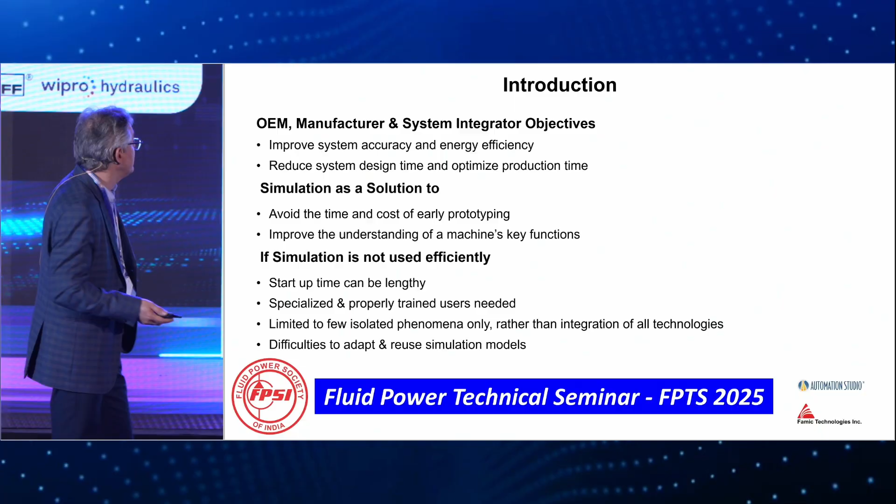So OEMs like to improve their system accuracy. They always think about energy consumption, moreover today. And they want to reduce time to market, so reduce the system design time and optimize also the production time. Also, simulation is well known; according to my study, for the last 30 years we are talking about simulation. This is a great solution to avoid the time and cost of early prototyping. Instead of creating a real prototype, you will be saving time for sure, specifically for system design.

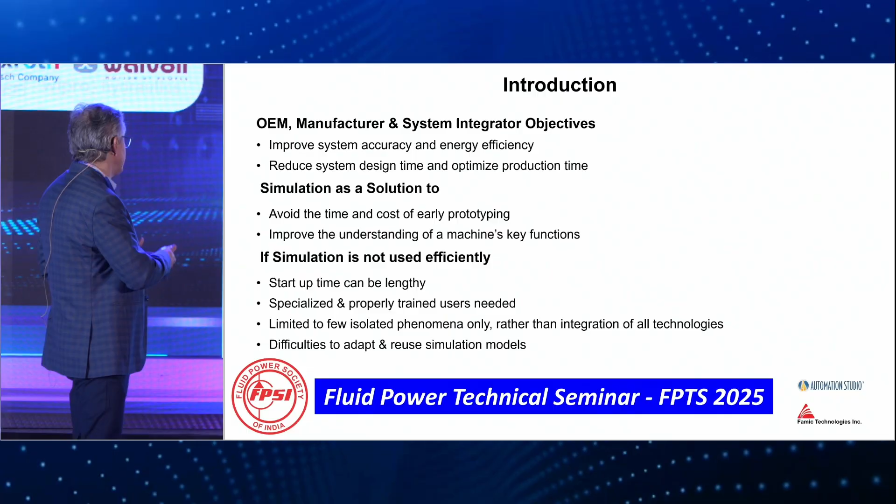Also, simulation is a great tool to learn and understand the behavior. But if simulation is not used well, there are other challenges. Commissioning time, startup time can be lengthy. Sometimes, if the user is not well trained, they will think the simulation can do everything for them. So they have to have a basic knowledge. Most of the time, over the last 20 years, there is a lot of simulation. Sometimes at OEMs specifically, they do a specific simulation on one part, but it cannot be integrated in the system. So sometimes simulations are...

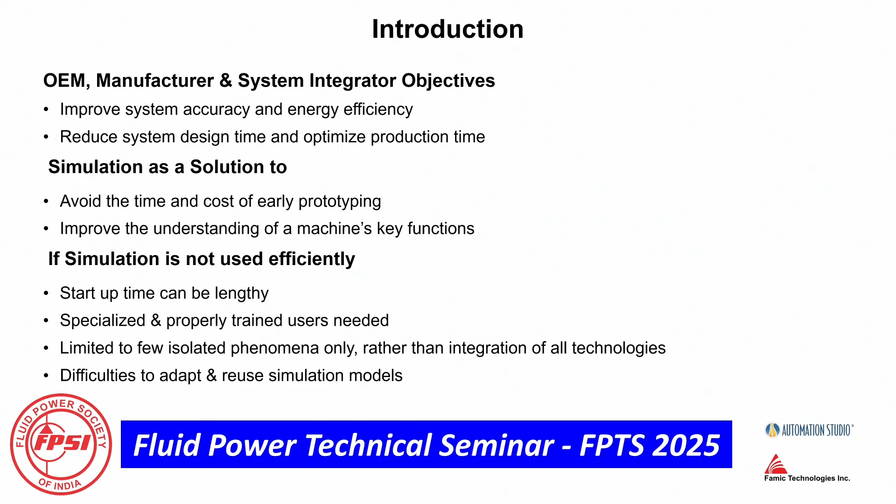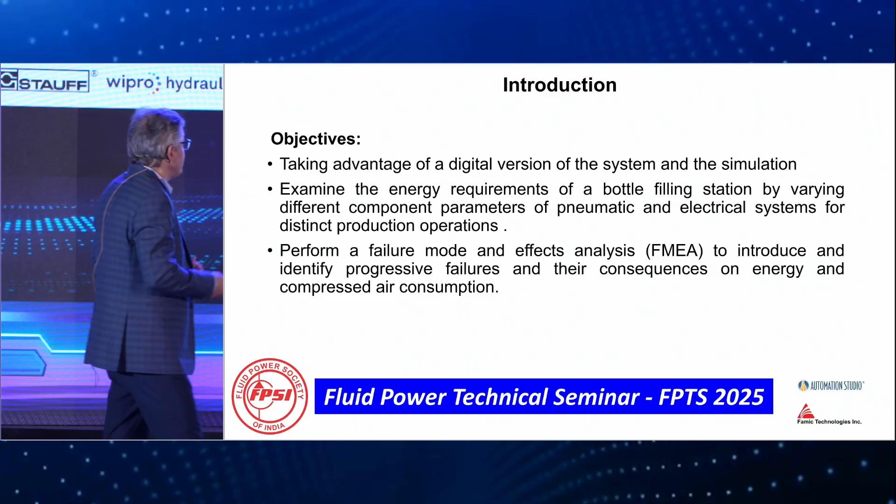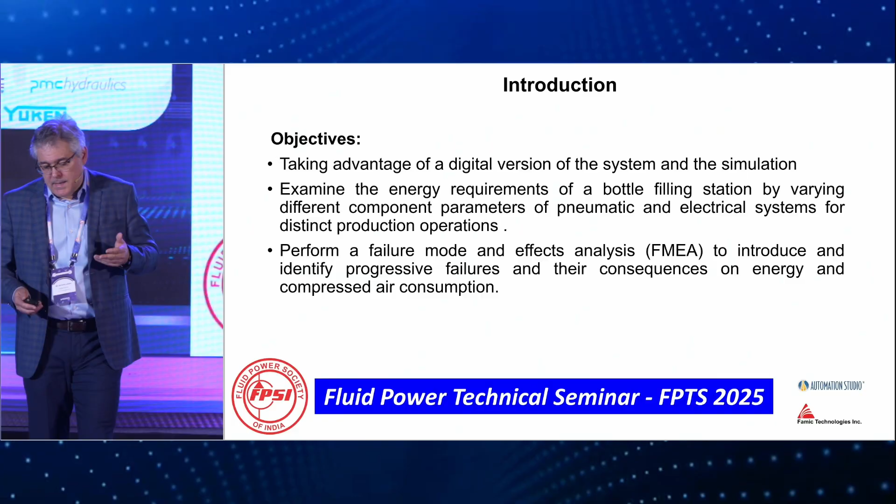Okay. So today I will present something pneumatic, a complete system. This is new for us since the beginning of the year. There are 3 objectives. Taking advantage of a digital twin, another buzzword for the last 10 years with Industry 4.0, and examining the energy consumption. This will be a single bottle filling station, a work center that we reproduce as a digital twin. Once we have the system, we can do a redesign of the system thanks to the simulation. Moreover, since we have an FMEA capacity, let's introduce some degradation in the system and see the impact on the cost of production or the energy consumption.

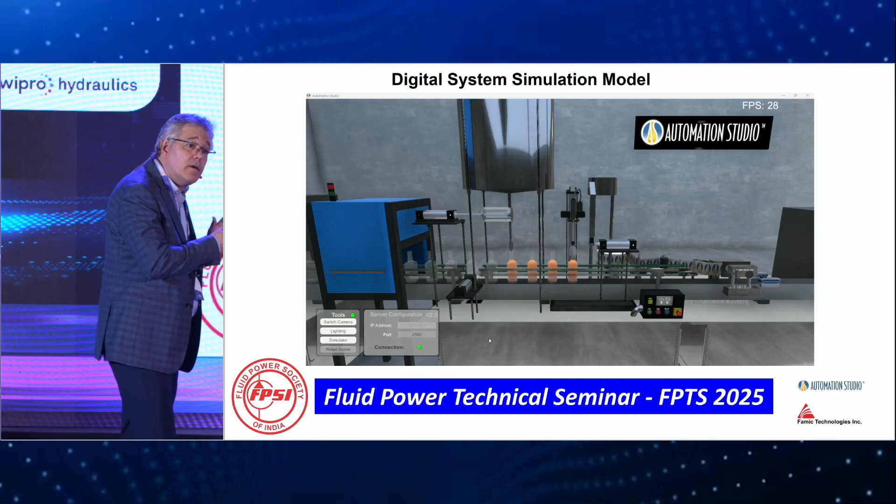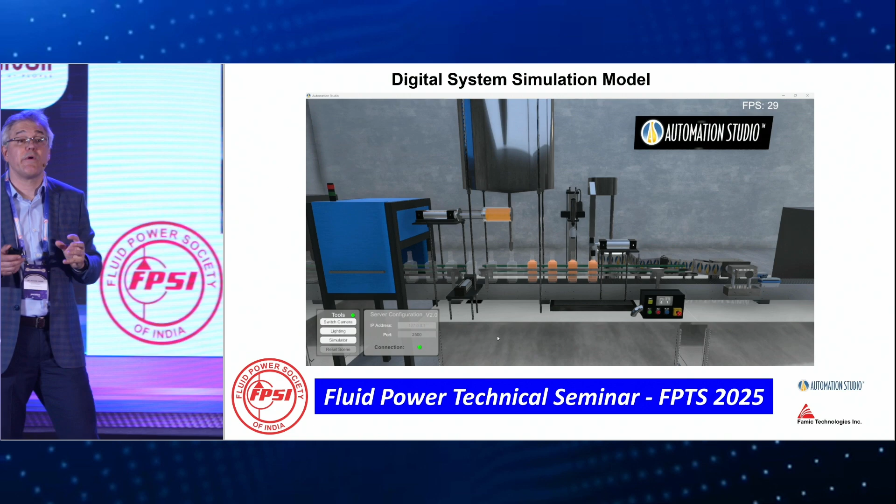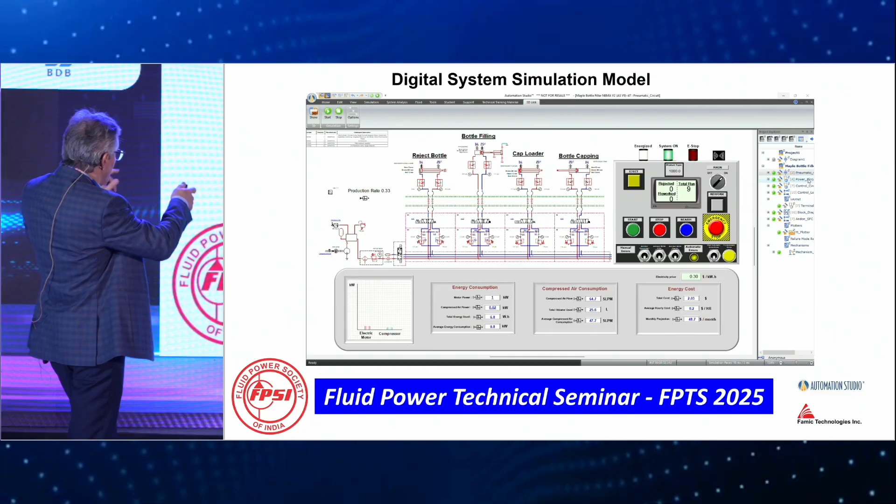So can you start the video, please? I will describe. This is a full system integration, multi-technology system. Some of you will recognize, this is a Unity platform. This is a bottle filling station with 4 steps, based on the real system. This is a work center. I'm from Canada, so we put maple syrup; this is a maple syrup bottle. The system is really driven by a multi-technology simulation engine. In Unity, we can program sensors. Each object is independent, so it acts similarly to a real system. You have the pneumatic system for function, the HMI to count, and thanks to our controller in the system, we reuse it to calculate the energy consumption.

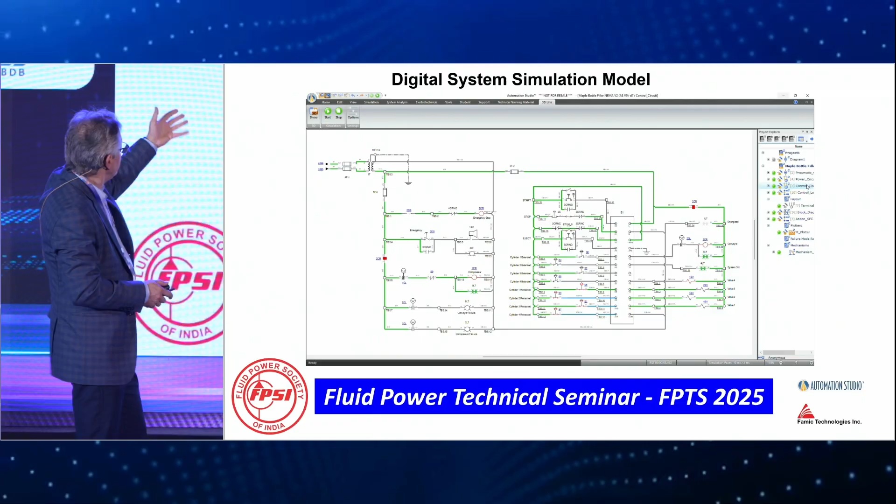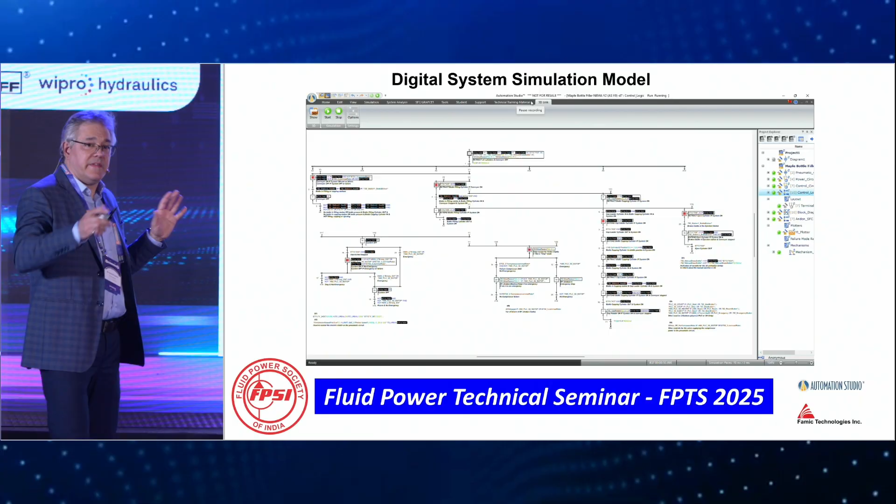Both conveyor and compressor are driven by an electrical system. We have VFD, and this is controlled by a PLC. And then you will see the logic behind in SFC, complex SFC, that drives the entire system in real time, based on the sensors in there. So this is the idea of the project. I will let my colleague Vivek present the detail.

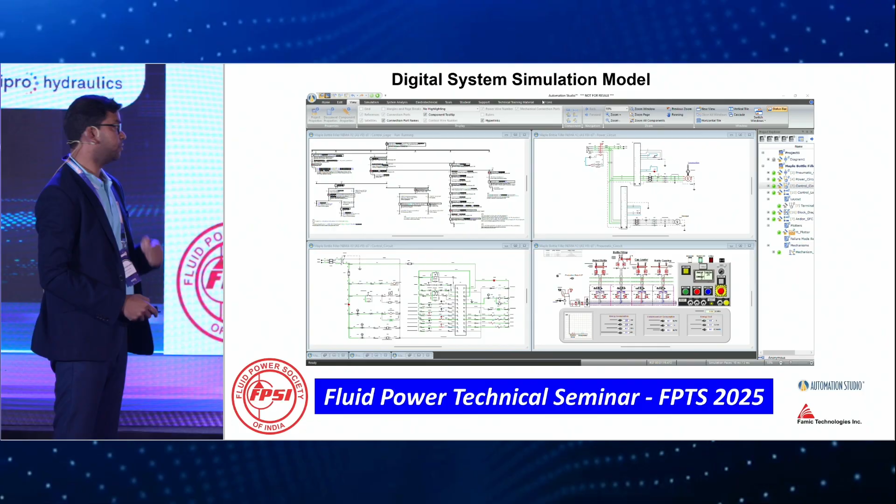Okay, thank you, Richard. So if you see here, we have 4 technologies which are driving this plant right now. All of them are integrated into one software. We can close the video, please. Okay, so we saw the 4 technologies integrated together. Now let us see the individual technologies and what goes behind in their operation.

So this is the pneumatic plant. You will see this is pretty easy to understand. We have kept a compressor here to pump the air through a FRL unit. We are using the solenoid controlled direction control valves, which are in turn controlling the operation of each cylinder. We have 4 operations taking place in the plant right now: the reject bottle, the bottle filling, cap loader, and bottle capping.

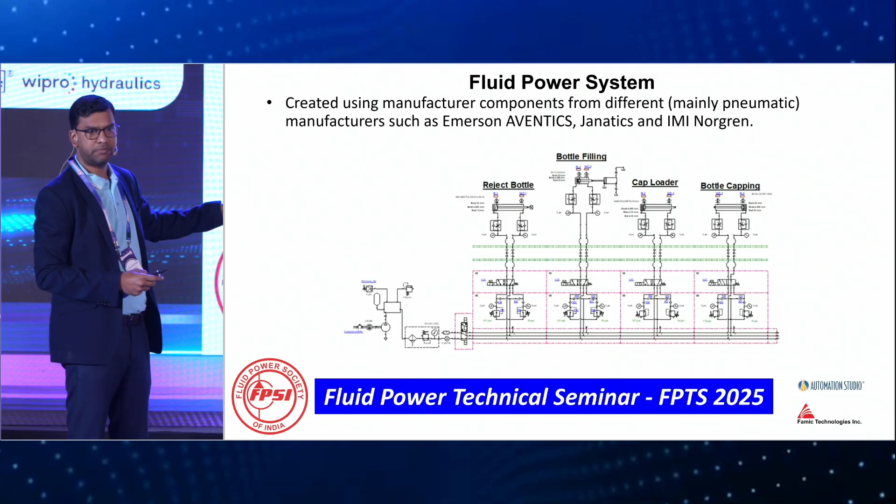Please note that the components being used in this system are the actual manufacturer component data. For now, we are using them from AVENTICS, Janatics, and IMI Norgren. So I was talking about the components which we are using. This is possible because we have the provision to model them in a hybrid mode. So what do I mean by that hybrid mode?

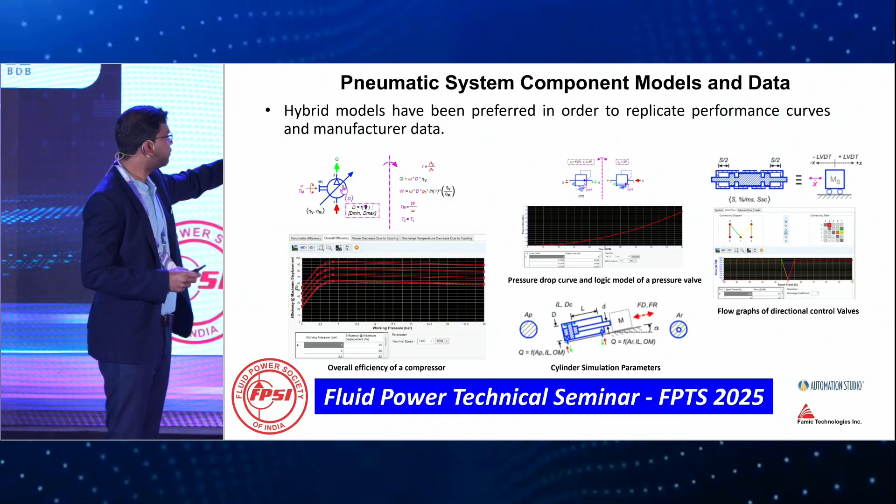We are, of course, taking the basic equations which are controlling the performance of any component. Plus, on top of that, you are able to input the performance curves, which are the actual parameters obtained from the different manufacturers. All of them will integrate together to give you the output of the component performance. This is an example of a compressor which we are seeing right now. Similarly, you can see we have the pressure relief valve, the cylinder parameters, and the direction control valve as well.

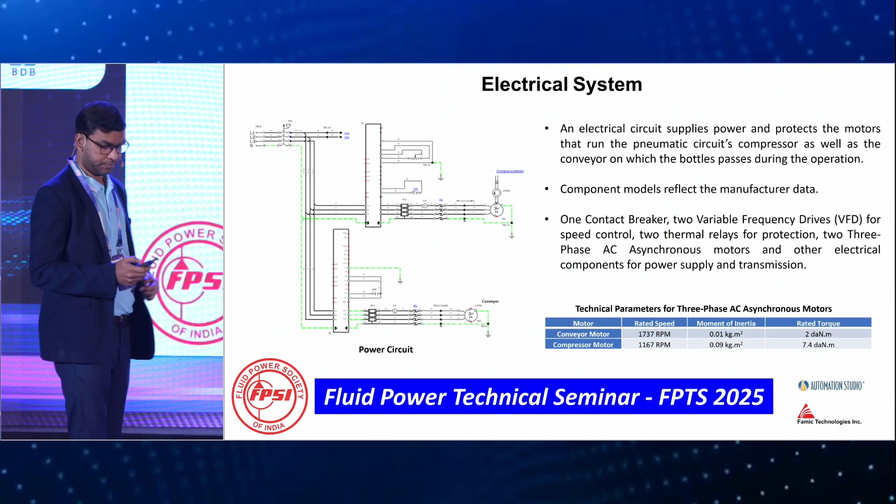This is the electrical system which is mainly driving those 2 motors. So we are using 2 different asynchronous motors. One motor is basically controlling the conveyor on which the bottle is moving, and the second motor is controlling the compressor RPM. Okay? So you will see we are using the VFDs, they are from ABB, and we are varying the parameters of the VFD in turn to control the RPM of the motor and thus the flow output from the compressor. These are the parameters which are being used for this experiment.

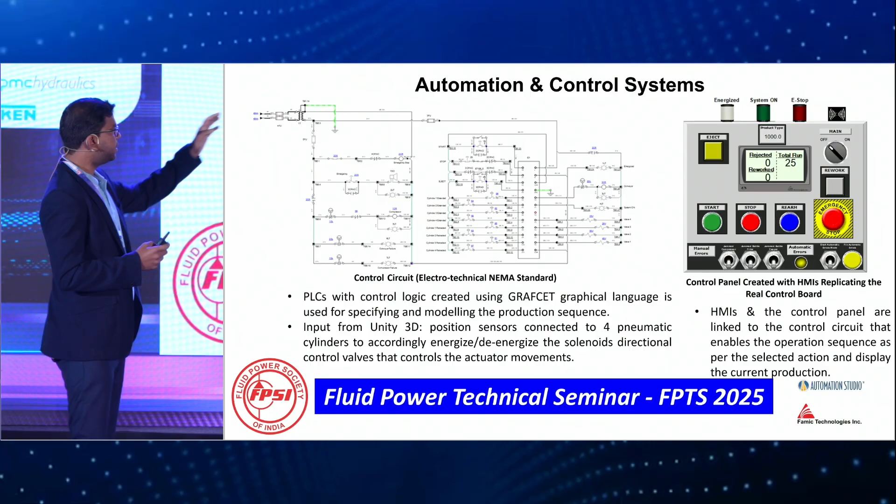Now, this is the automation and control system. So basically, we have input. We are taking the input from different sensors which have been put over the cylinders in the pneumatic system. The signals from the pneumatic system cylinder sensors are coming back here. Through different logics, they are controlling the output of the solenoid control valves which we saw in the pneumatic system.

On the right side, you see this is a virtual HMI panel. This represents very closely the control blocks which are easily found in different plants. It constitutes all that you need to monitor your plant and productivity, along with the lighting, LEDs. It has the push buttons, switches, emergency stop, plus a display as well, which will show you the count of bottles which have been successfully filled, or if something has been rejected, that can also be displayed over here.

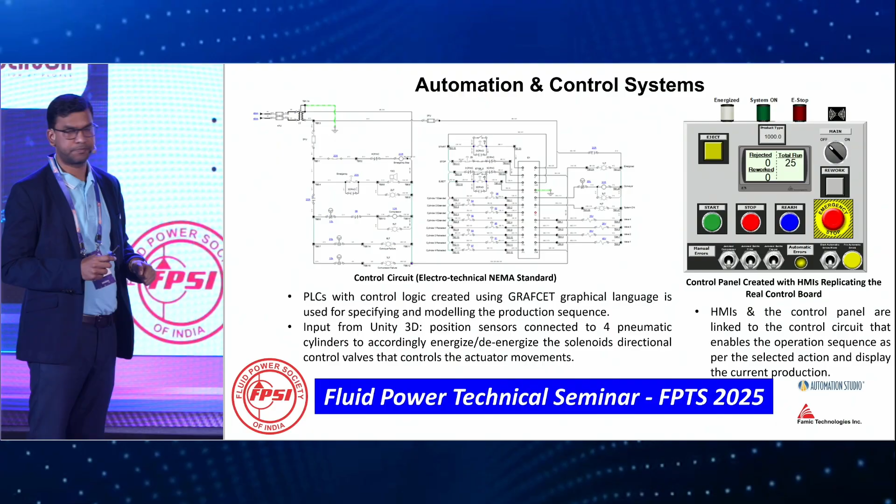Okay, so we are trying to monitor the energy and air consumption of this plant by varying the different parameters inside the components being used in the pneumatic system and the electrical system as well. So we are using these equations to get to the energy calculation. Total energy is nothing but integration of power over a period of time. Average energy consumption is the total energy per relative simulation time. And we are calculating the total cost by total energy used times electricity price.

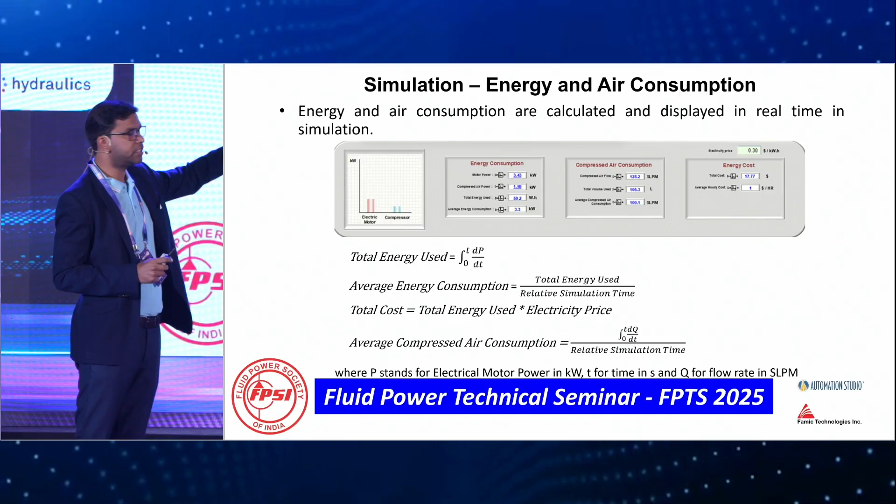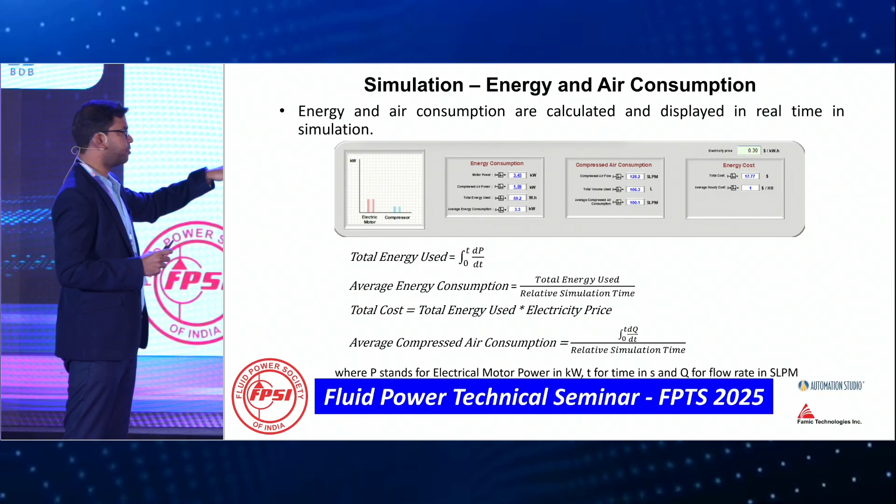For this study, we have taken $0.3 per kilowatt hour as a sample cost to calculate the total cost involved. Similarly, the average compressed air consumption is integration of flow with respect to the relative simulation time.

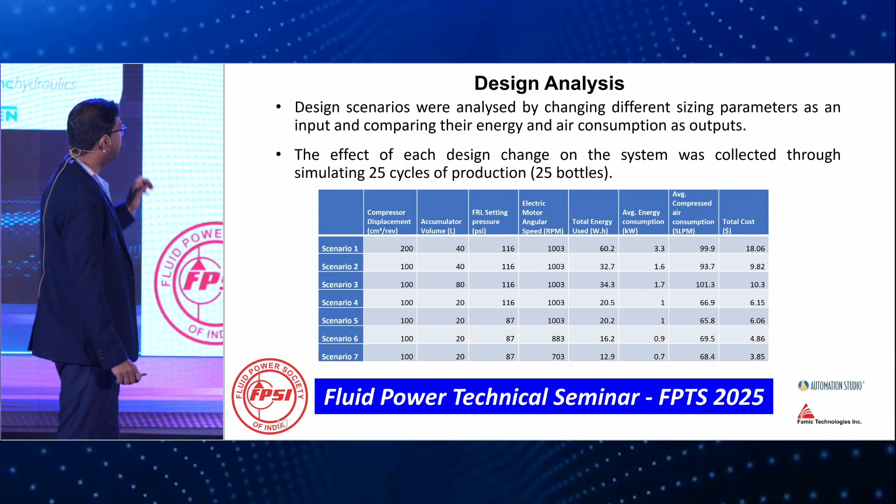Okay, so these are some of the findings which we have found in our experiment. Please note all these findings which we are running are based on the 25 cycles iteration. So that means once 25 bottles of maple syrup have been filled, we start and stop the simulation again for the next parameter readings.

Okay, so in scenario 1, you will see these are the default parameters which we have kept there: the compressor displacement, accumulator volume, pressure relief valve, pressure reducing valve setting, and the angular speed of the motor. And with these parameters, you can see the total cost which we arrived at is around $18. Now in the next iteration, we reduced the compressor displacement. Now you will see if you go from 200 to 100, there is a very, very effective reduction in the total cost. It brings it down to 9.8.

The next scenario we simulated is, now we change the accumulator volume. So we eventually bring down the accumulator volume to half, from 40 to 20. If you see in scenario 4, we are further reducing the total cost involved to 6.15. The next iteration we run is now reducing the FRL pressure setting, the pressure reducing valve. And if we bring it down, again you will see in scenario 5, there is a slight change in the total cost involved.

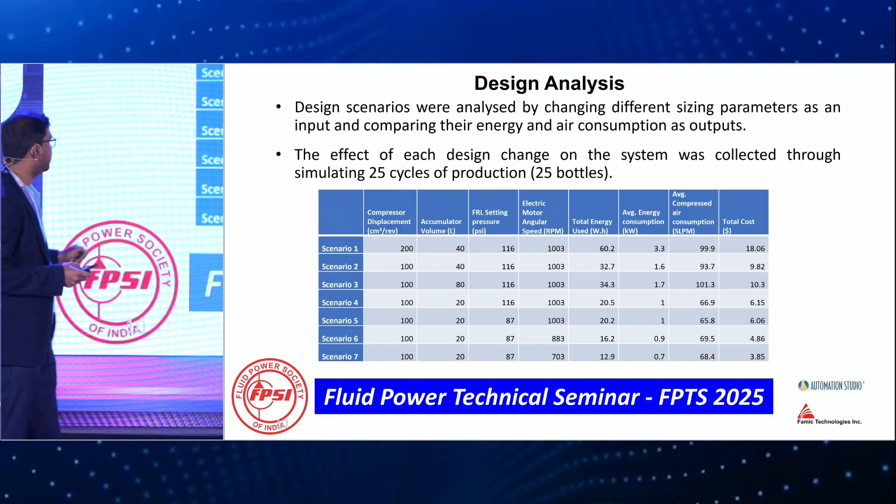And finally, in scenario 7, you will see we are also reducing the angular speed of the motor. And finally, we are able to go to 3.85. It's a big considerable difference in the total cost involved in the plant operation. Why we did this basically is we did not vary all the parameters at one time. We did that one at a time. The reason being, we wanted to see what is the impact of each component parameter with respect to the total cost involved in the plant operation.

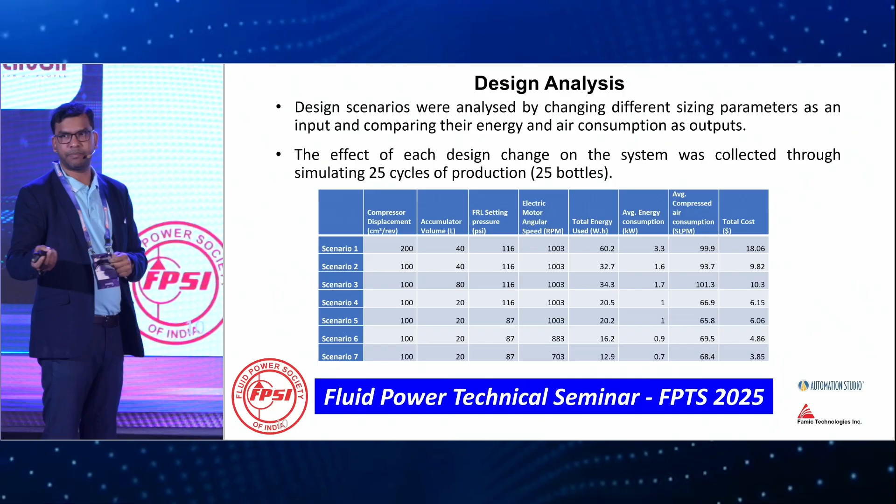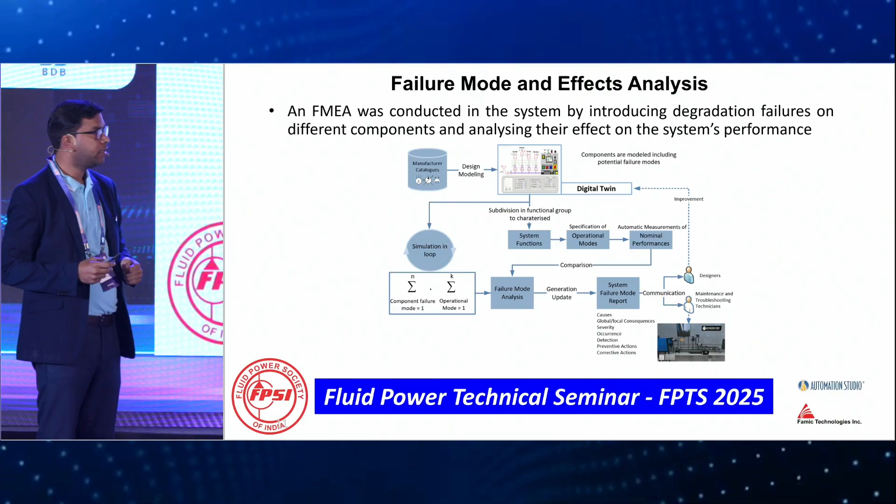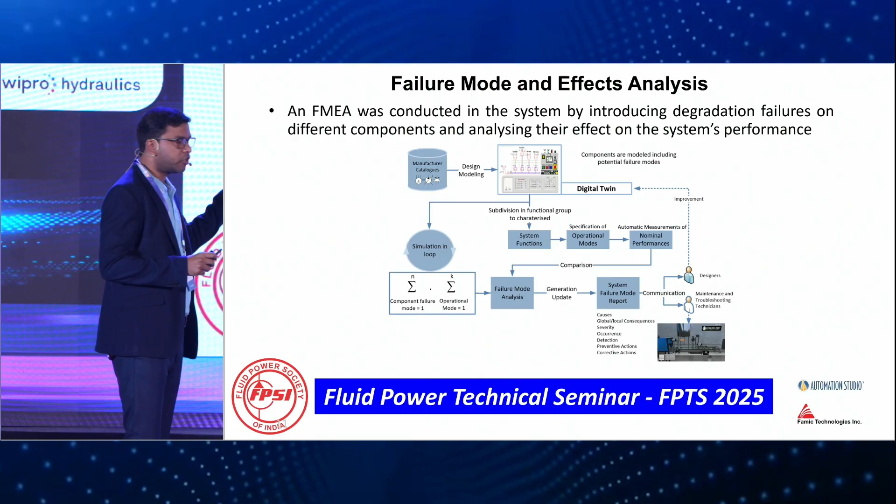This is the next level of study which we incorporated in this experiment, which is the failure mode and effect analysis. My colleague Richard presented a paper on this subject in last year's conference here. So I'll just give you a very brief overview of what we are doing here right now. Automation Studio gives us the capability to introduce faults inside each component, whichever we want in the system, and we can see the progressive failures which it generates in the plant.

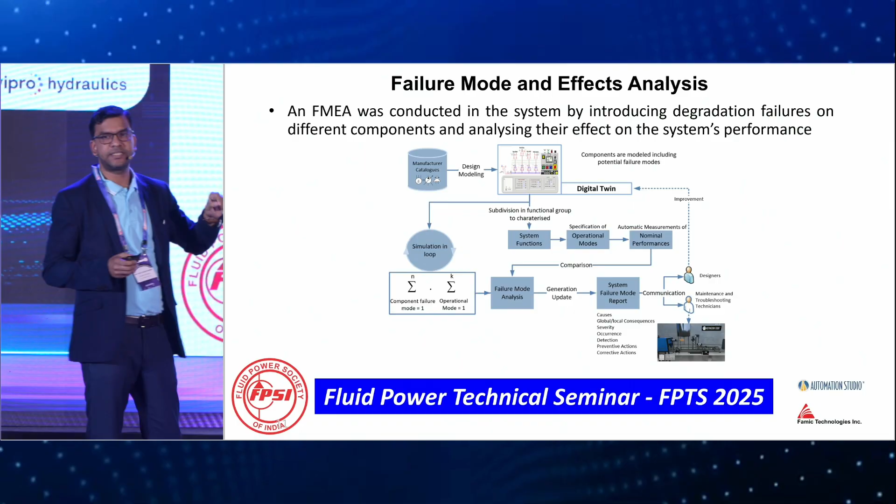So for this study, for the filler cylinders, we introduced some faults inside them, and we want to see what is its impact on the total cost and the compressed air consumption. Okay, so as I mentioned, one more thing is we are not introducing any hard faults, as in the cylinder is jammed or the port is blocked, because eventually it will stop the production of the plant. It's of no value for us to study. So we are putting in failures where the plant is still running, but it is impacting the behavior and the interaction of all the system together, and finally the output, that is the total cost and the consumption of compressed air.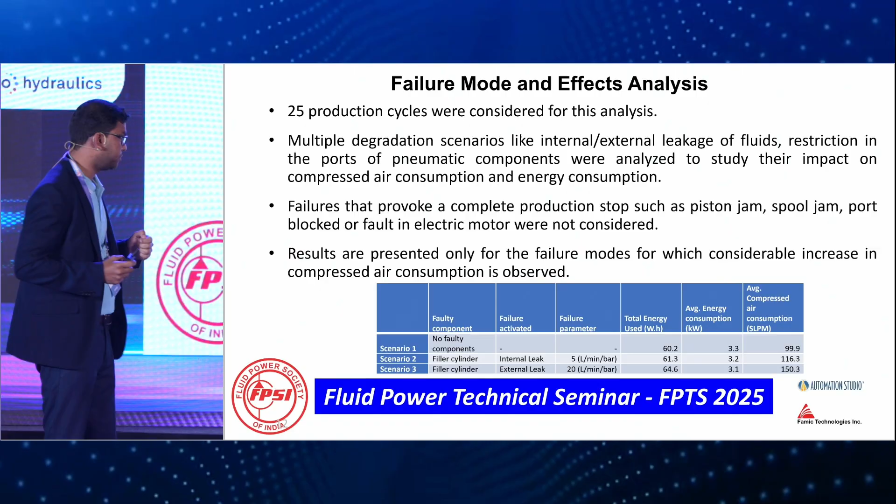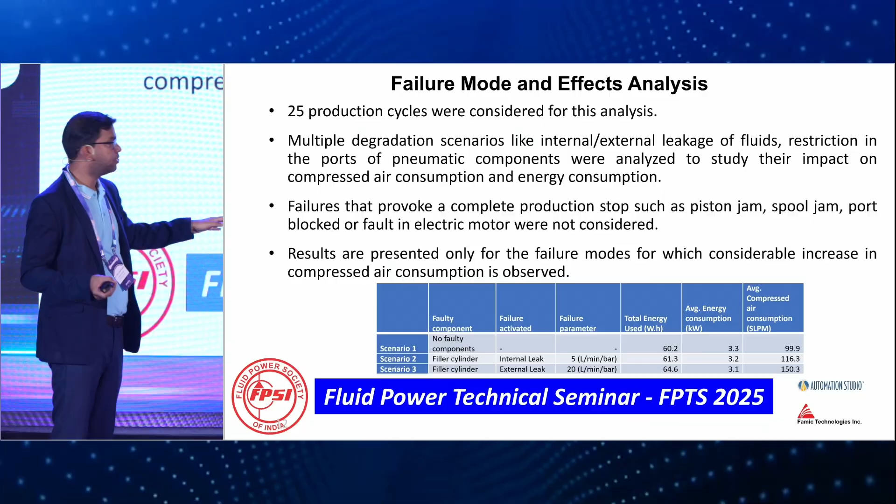So if you see scenario 1, there is no faulty component, and we found the average compressed air consumption to be around 100 standard liters per minute. The next thing we did is, in the filler cylinder, we introduced some internal leak. The value is 5 liters per minute per bar, and you will see there is an increase in the consumption of compressed air to 116. In the next scenario, on top of the internal leak, we also added an external leak, valued at 20 liters per minute per bar. And when we did that, you see we are increasing the compressed air consumption by almost 50%, to 150 standard liters per minute.

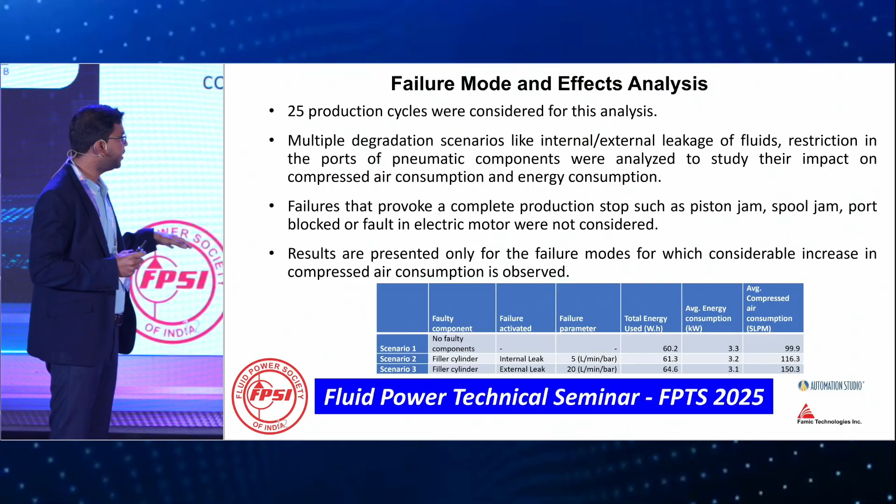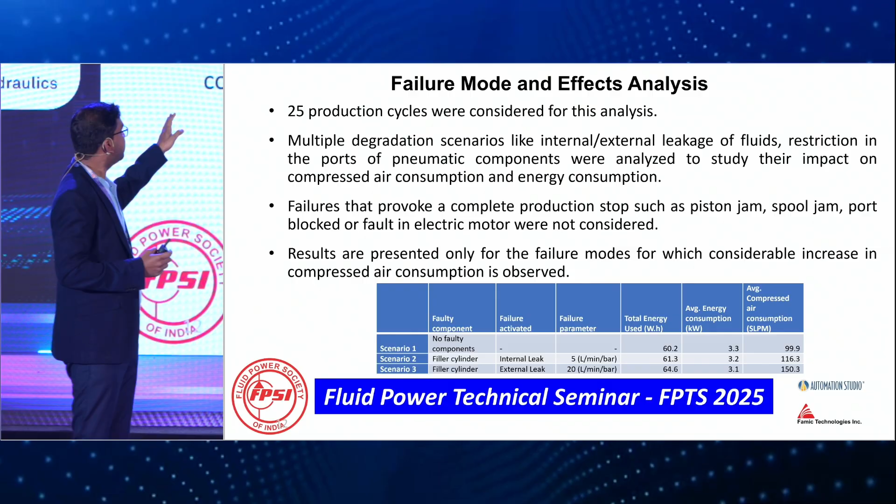So this is just one scenario which we are able to simulate. This is an ongoing study. We can introduce multiple faults in multiple components being used in any system, and thus see what is the impact on the performance. So the failure mode and effect analysis is able to generate a report at the end, and for each failure, it will give you the probable causes of that failure. So if something like that happens, it's very easy to identify this is the cause and this is the effect which is happening on the output or the production of the plant.

And finally, for conclusion, I will let my colleague Richard wrap it up. You could do it as well. That's okay. Okay, so I come back on my first fact.

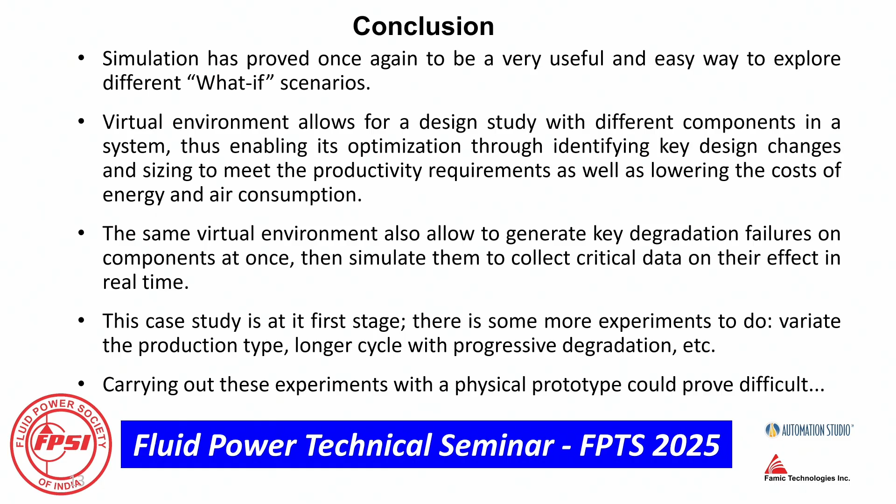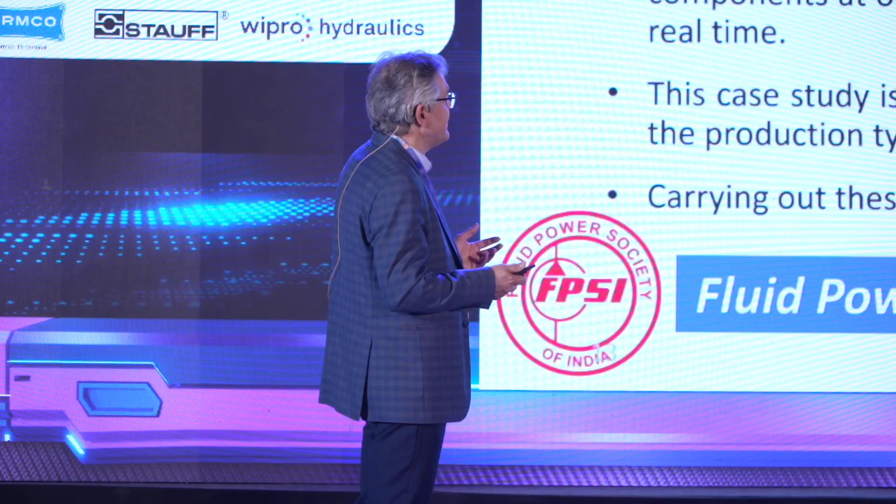So simulation has proved once again that this is a wonderful tool. You can do what-if scenarios, whatever you want. The virtual environment, which is the digital twin: you have an existing design or an existing machine, you replicate it virtually, and you can change component parameters. It allows you to really identify the key design improvements. Third point, the same virtual environment allows us now, with simulation, to do degradation and see what-if again.

But our case study is at the first step. So we will do more with the same project. We want to experiment more. Next step, for example, we can use an OPC server linked to the real machine. This is another example: we can change the production type. If we change the liquid, there will be an impact.

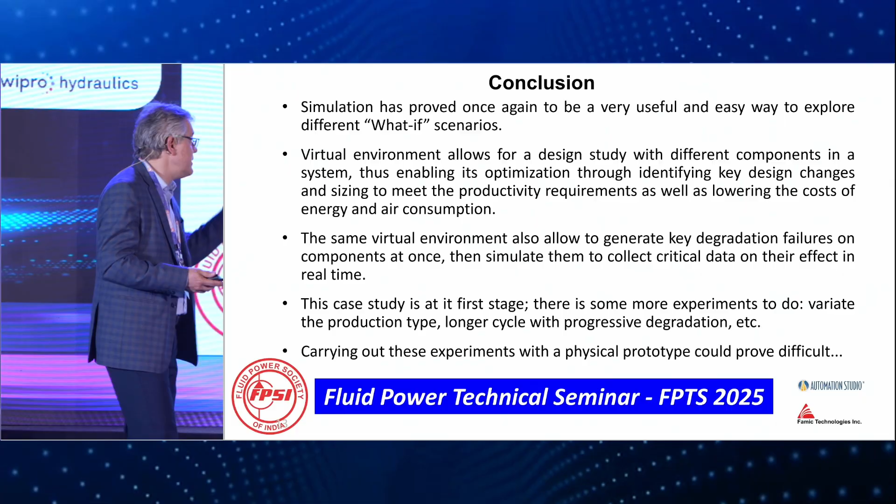We would like to do a longer cycle when we do progressive degradation. Carrying out these experiments with a physical prototype could prove difficult. That was my first point. So this is the presentation that we wanted to present to you here.

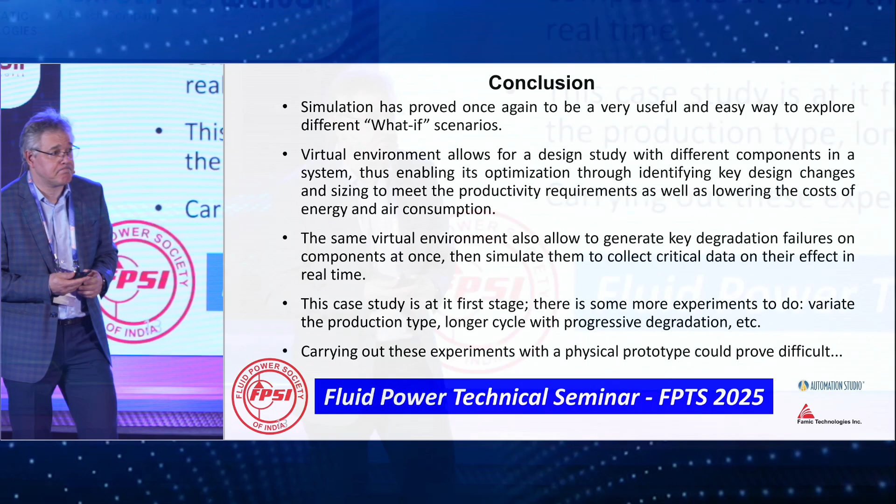Basically, you have performed your analytical study on Automation Studio, right? Yes. So the study has not been validated experimentally. So what are the assumptions that you have taken for your analytical study? Because there may be certain frictional losses and all those things. So how have you characterized those losses?

Yes. So I will answer your two-part question. First, of course, we are not doing it in a real prototype, but as I mentioned at the start, we already created digital twins for different manufacturers. Usually we get an accuracy of around 95% for those. So even though they are not on plant, these studies use the actual performance curves and parameters provided by the different component manufacturers.

Okay. With respect to the other parameters which you mentioned, the friction and others, you are right. At this point in time, we are keeping default values in all the cylinders; the damping coefficients and everything are certain default values which we have taken. We have not experimented with those values yet. Right now, we are focusing on the two faults I told you about, only the internal leak and the external leak.

What you are saying right now is, of course, the next phase of study. We will try to introduce more faults, maybe increase the friction, the damping coefficient, and then we will see its effect on the overall behavior.

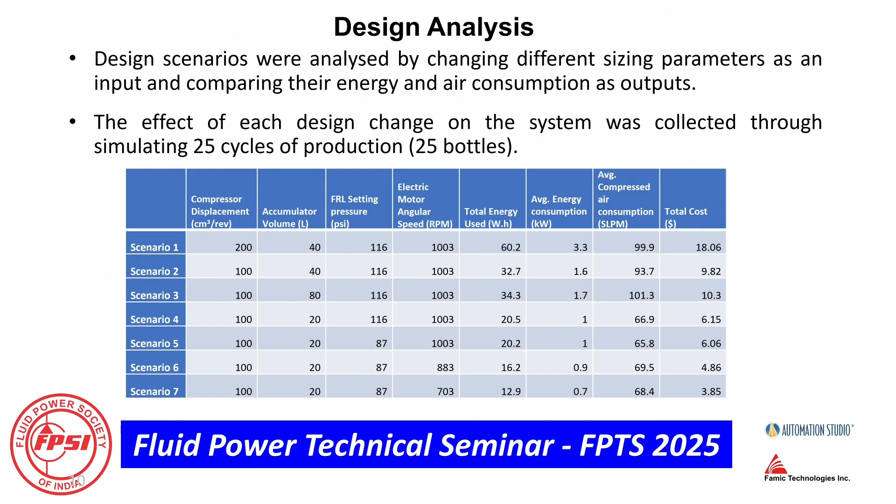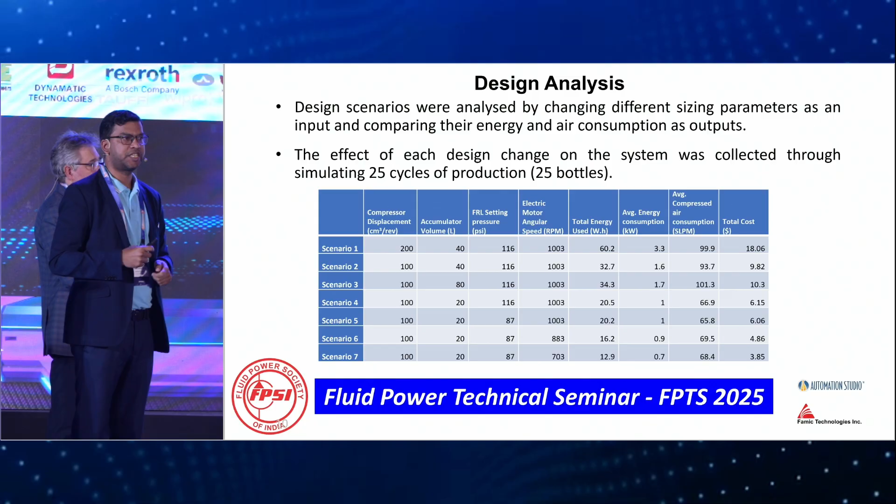Now, let me please tell you this. We are aware that if we reduce the compressor displacement, we reduce the pressure values, we reduce the angular speed, and it affects the production time. We are aware of that. But when we did more experimentation through different iterations, we found that the time loss is really negligible with respect to the benefits it will give you if you really reduce these parameters and reduce your total cost.